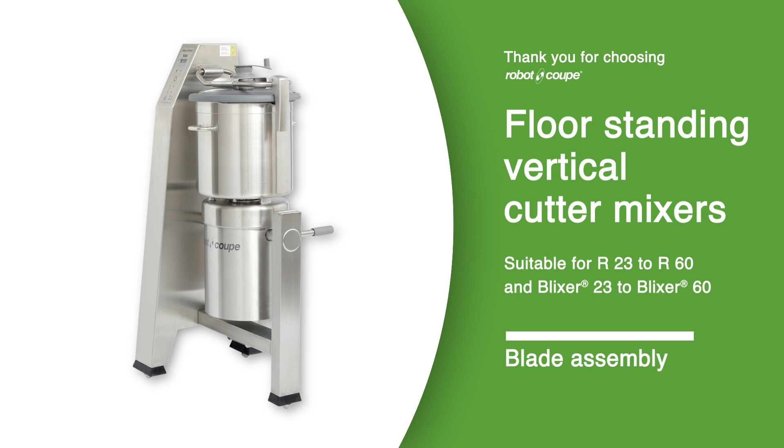This is a training video explaining the essential steps for the different blade assemblies of your floor-standing vertical cutter mixers. This video is suitable for R23 to R60 and for Blixer 23 to Blixer 60. Here are all the possible blade assemblies.

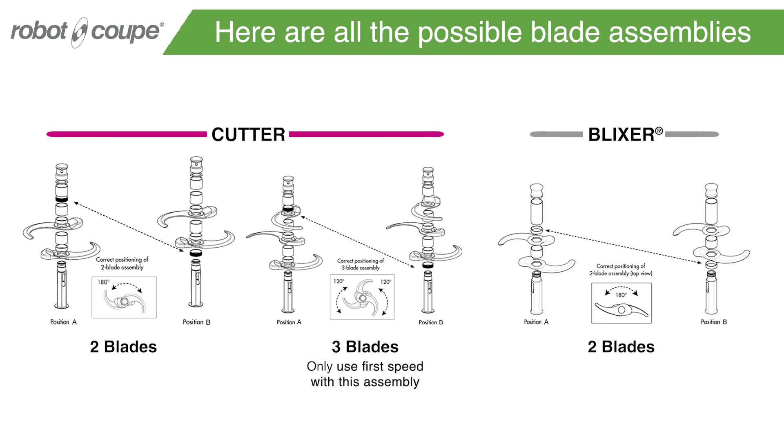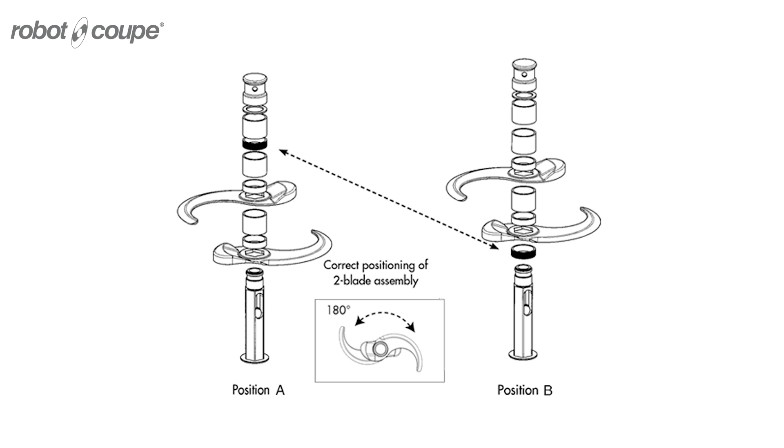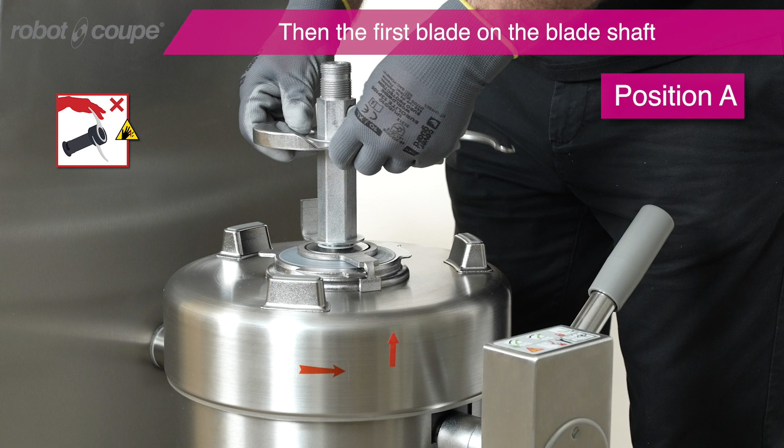Cutter 2-blade assembly, position A, for fine chopping and emulsions, for grinding and kneading. Install the blade remover on the motor shaft, then the blade shaft on the motor shaft. Install the first blade on the blade shaft, then the narrow spacer, then the wide spacer, then the second blade on the blade shaft.

The blades have to be at 180 degrees. Install the narrow spacer on the blade shaft, then the wide spacer, then the narrow spacer again, then the wide spacer, then the screw nut on the blade shaft.

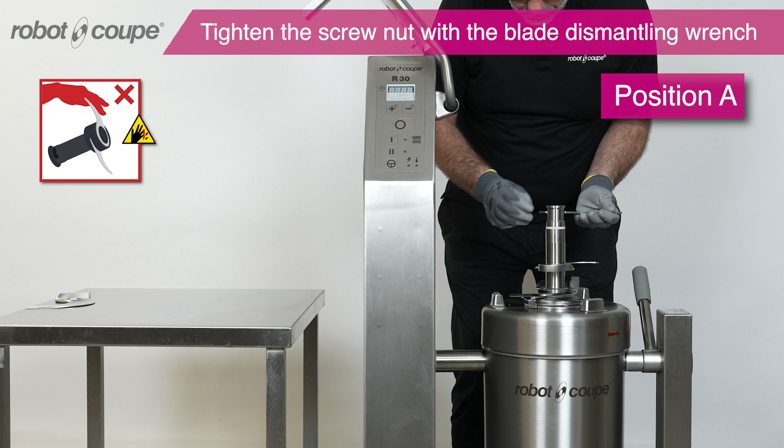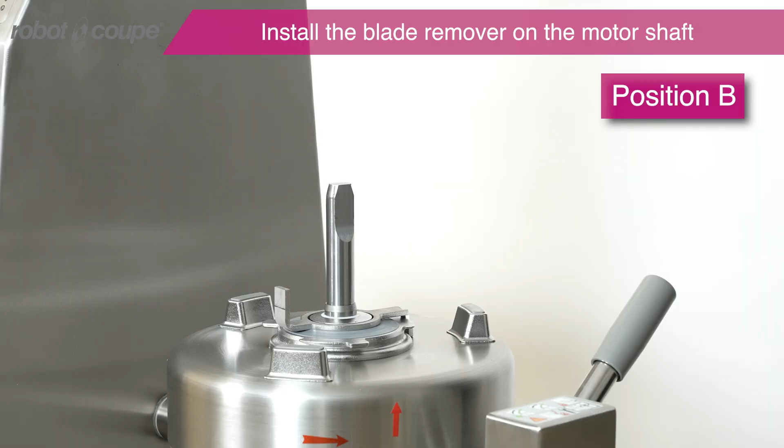Cutter 2-blade assembly, position B, for coarse chopping. Install the blade remover on the motor shaft, then the blade shaft on the motor shaft. Then the narrow spacer, then the first blade, then the narrow spacer, then the wide spacer on the blade shaft.

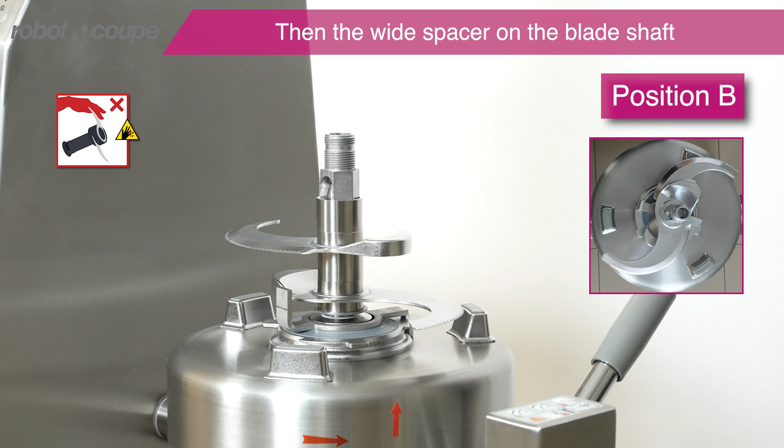Install the second blade at 180 degrees. Then the narrow spacer, then the wide spacer, then the wide spacer again, then the screw nut on the blade shaft.

Cutter 3-blade assembly. Important: with the 3-blade assembly, use the first speed only, 1,500 rounds per minute.

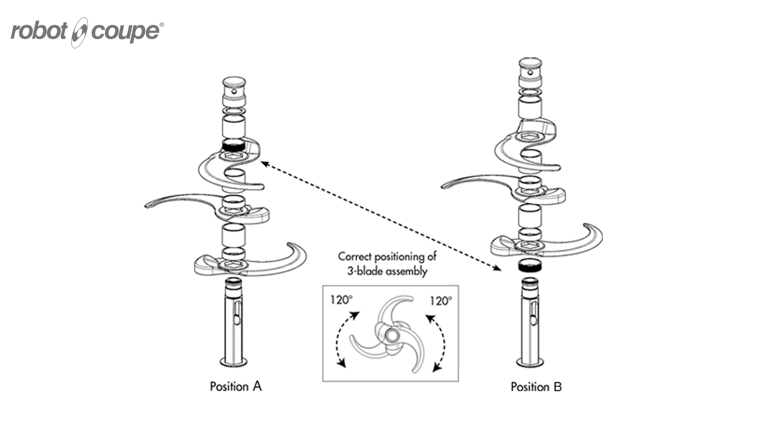Cutter 3-blade assembly, position A, for fine chopping and emulsions, for grinding and kneading. Install the blade remover on the motor shaft, then the blade shaft on the motor shaft. Then the first blade on the blade shaft, then the narrow spacer, then the wide spacer.

Install the second blade at 120 degrees. Then the narrow spacer, then the wide spacer. Install the third blade at 120 degrees. Then the narrow spacer, then the wide spacer, then the screw nut on the blade shaft.

Cutter 3-blade assembly. Important: with the 3-blade assembly, use the first speed only, 1,500 rounds per minute.

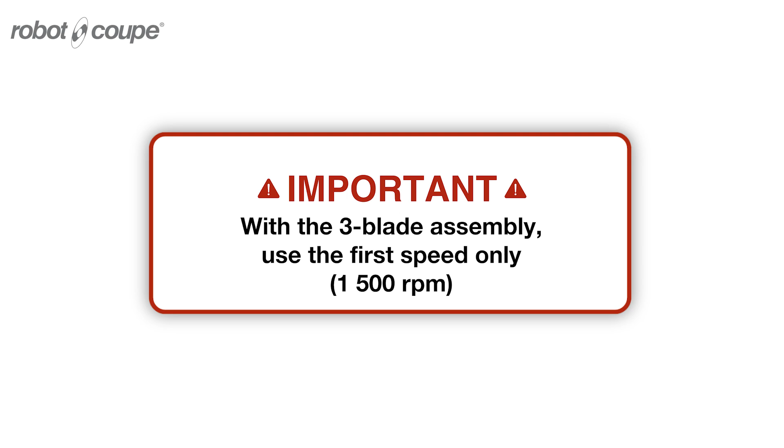Cutter 3-blade assembly, position B, for coarse chopping. Install the blade remover on the motor shaft, then the blade shaft on the motor shaft. Then the narrow spacer, then the first blade, then the narrow spacer, then the wide spacer on the blade shaft.

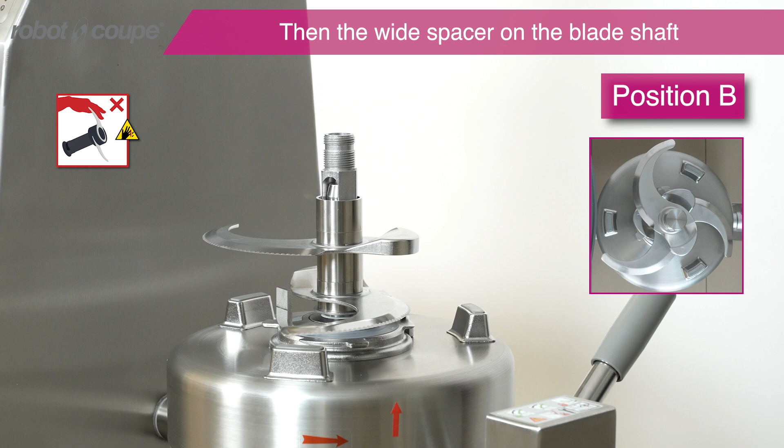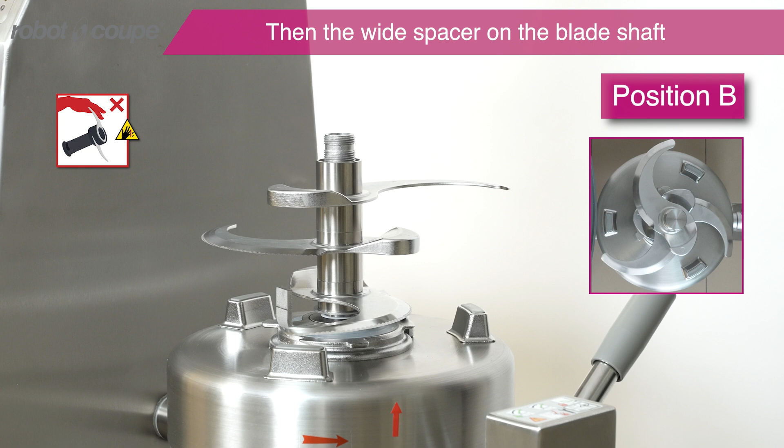Install the second blade at 120 degrees. Then the narrow spacer, then the wide spacer. Install the third blade at 120 degrees. Then the wide spacer, then the screw nut on the blade shaft.

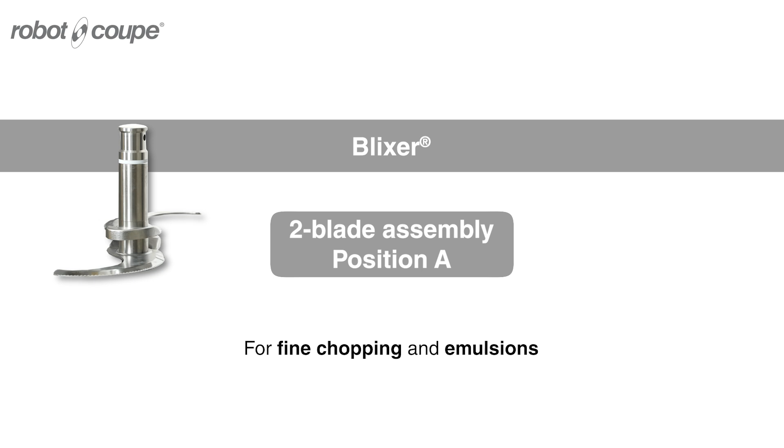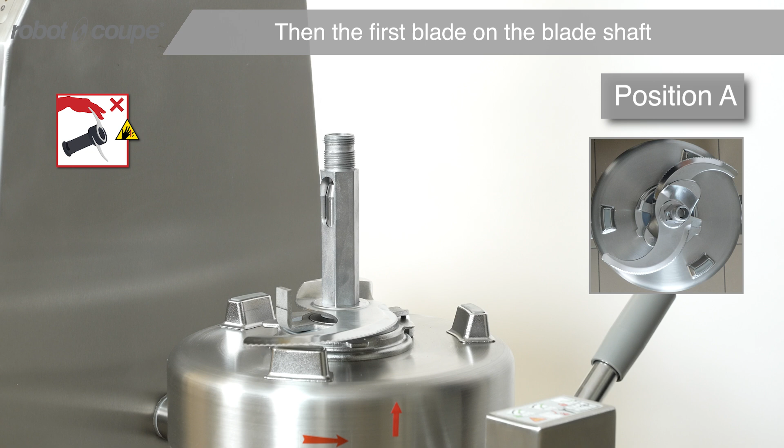Blixer 2-blade assembly, position A, for fine chopping and emulsions. Install the blade remover on the motor shaft, then the blade shaft on the motor shaft. Then the first blade on the blade shaft, then the wide spacer.

Install the second blade at 180 degrees. Then the narrow spacer, then the wide spacer, then the screw nut on the blade shaft.

Blixer 2-blade assembly, position B, for coarse chopping. Install the blade remover on the motor shaft, then the blade shaft on the motor shaft. Then the narrow spacer, then the first blade on the blade shaft, then the wide spacer.

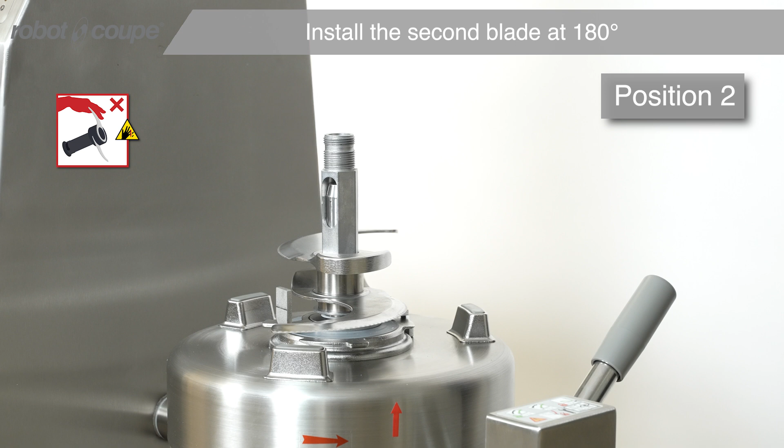Install the second blade at 180 degrees. Then the narrow spacer, then the screw nut on the blade shaft.

Watch the next chapter for accessories.